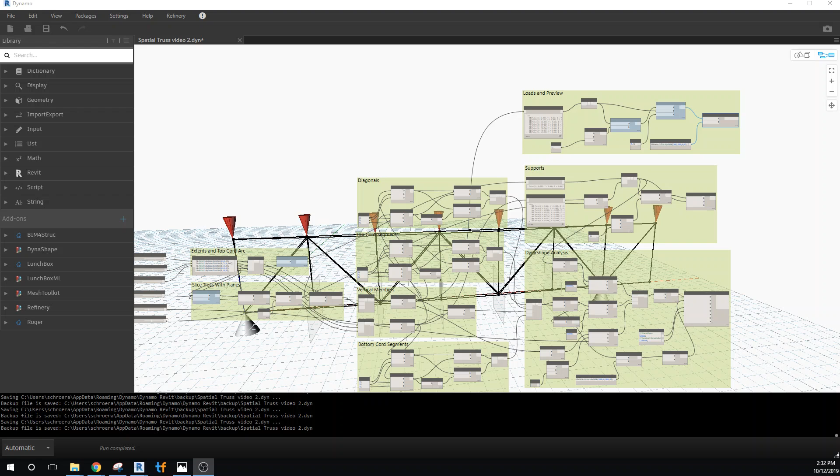Okay, I've gone ahead and cleaned up some of the code, and I pulled all of the inputs over to this side, out of some of these boxes. I'll zoom into these various sections so you can compare your code to what I've done.

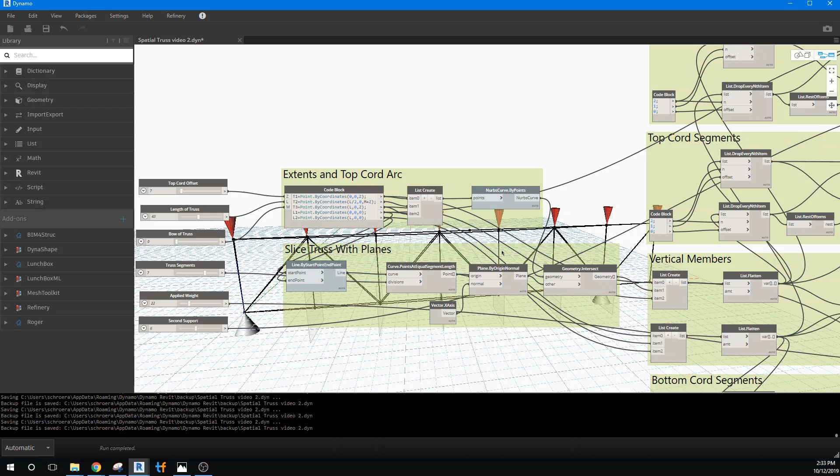So we defined the shape of the truss, with 3 top points on the top chord and 2 bottom points. We sliced it up with planes, and then pulled all the segments out that we got from that.

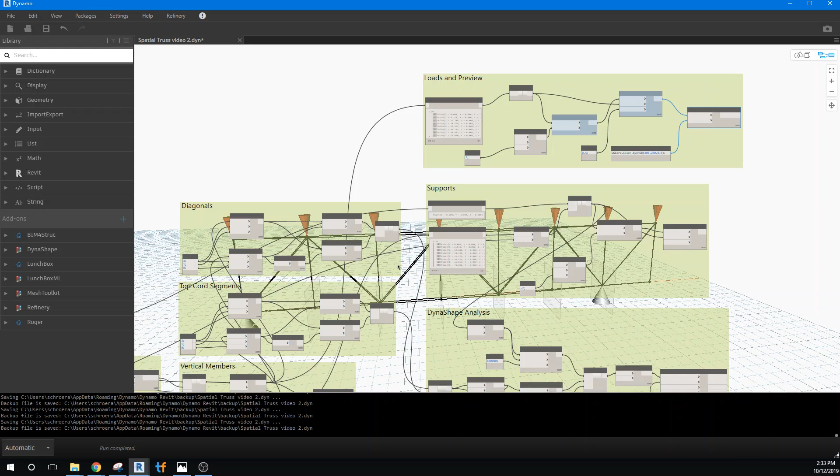That gave us a relatively straightforward method of making a truss system. Then we created both a load preview, and I'll zoom in here so you can see what this looks like again, the load preview.

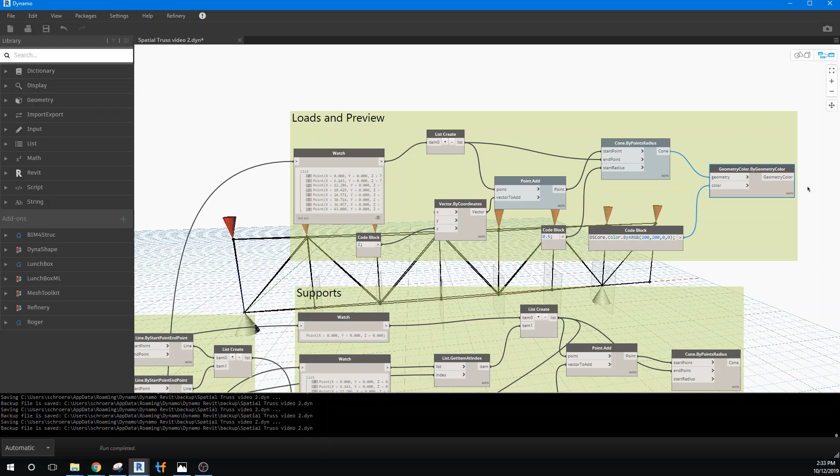It doesn't come off of here for the actual loads, we're actually stealing it. Where does it show it coming down here? I'm not seeing the loads attached. Oh, that's because they're coming in here, so there must be some place that I grabbed them down there.

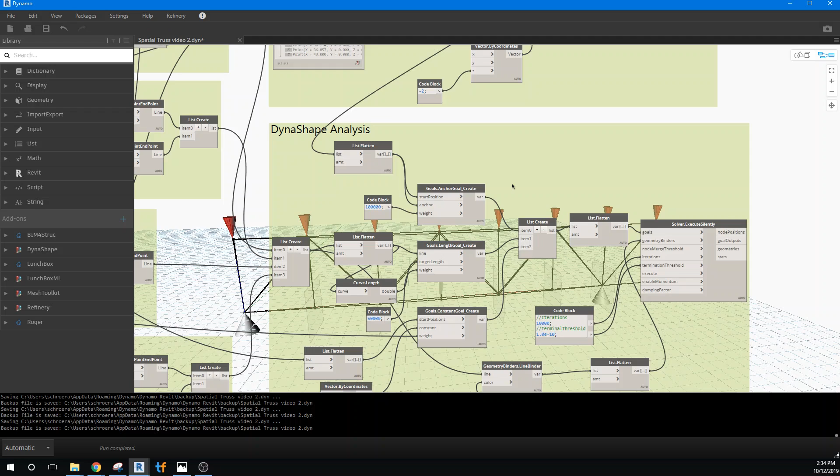Anyway, so that's just the loads preview. Our supports, we're taking our supports and putting them down into our analysis. And then down below here, we're getting into our analysis.

If I pull this whole thing off to the side and zoom in on our sliders, I think this is a great chance to experiment around with what we've actually created.

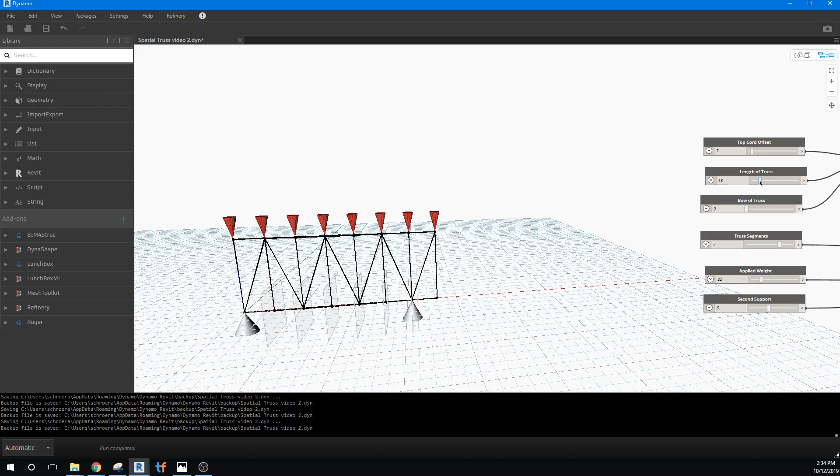So we can control the length of the truss. We can make it longer, and as we do, we see a little more deflection in the truss system, from basically looking like nothing to seeing this appearance of some deflection here.

And if we make the truss shallower, you'll notice that the truss loses its strength. Here we have extreme amounts of deflection happening when the top chord and bottom chord are offset a little bit.

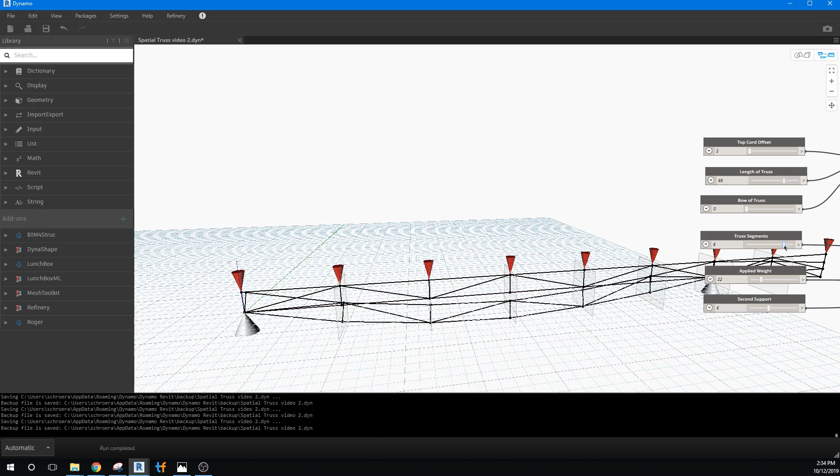We can see what happens if we add truss segments to it and whether it gets stiffer. And we have obviously this support over here on the side.

We can then reduce the weight, which just gives us a way to modulate how much deflection we actually look at. And we can pull the second support in or out depending on how we choose to do that.

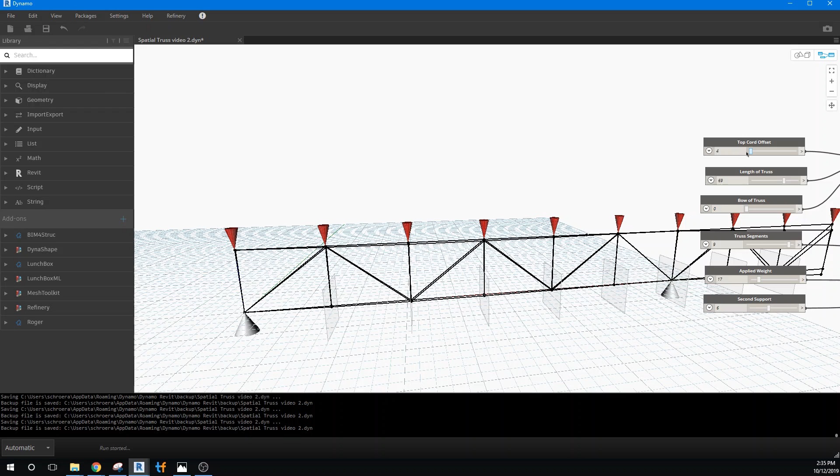So we'll actually offset the top chord a little bit so it behaves a little stiffer. Whoops. Let's pick a medium range value here.

The other thing that we can do is actually bow this truss, which is a nice feature. So we can continue to go up and make it a bow truss for a roof system. There's a lot of interesting things that can be done here, changing segments, how long it is.

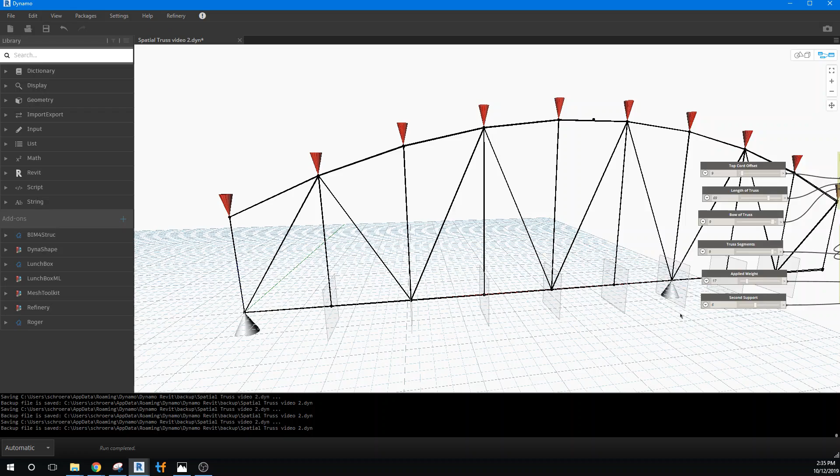With that in mind, we'll move off now to actually being able to visualize this idea of whether an element is in tension or compression. So we have this output of our geometry, and we're going to make a section, I'll call it evaluate strain.

So let's take a look at what these geometries look like. I'm going to make a watch list. These are the deflected geometries, not the original geometries. And it turns out to be a list of lists.

So the first thing I want to do is make it a much simpler list, so I'm going to flatten it. If I pull these geometries into a flattening and look at this list, now we have a list of just lines, those are the actual deflected lines.

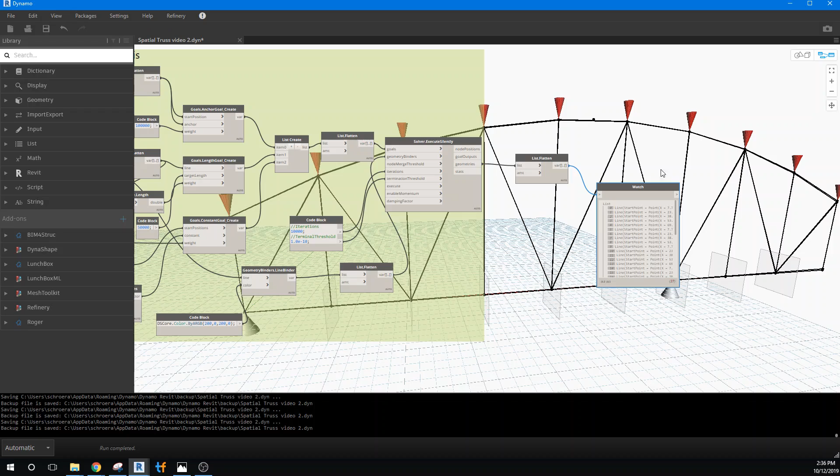If I accentuate this a little more, let's go back and do some adjustments to our truss as we work through this. I'm going to make the truss a little bit shorter so it fits on the screen better. I'll take the bow out of the truss, and 9 segments is fine.

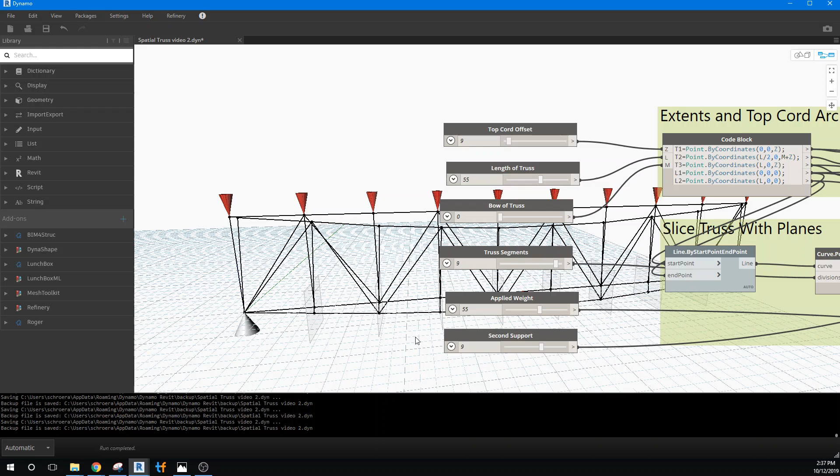I'll put a little more weight in so we can actually see the deflection, and we'll deal with it as a simply supported beam. So I'll put this other support all the way out at the end, which happens to be 9. Now we have a pretty good visualization of a truss and its deflection.

So we have this idea of a starting geometry and then a deflected geometry. Those come from connecting the nodes together with how much each element has elongated, and you get that appearance of deflection. So we have those lines, and also the lines, I'm going to copy the list flatten again.

As I said, we also have the lines for the starting geometry. If I highlight this, you'll see that's the flex geometry. And if I go back over here and look for this geometry, I believe it is, let's plug that in.

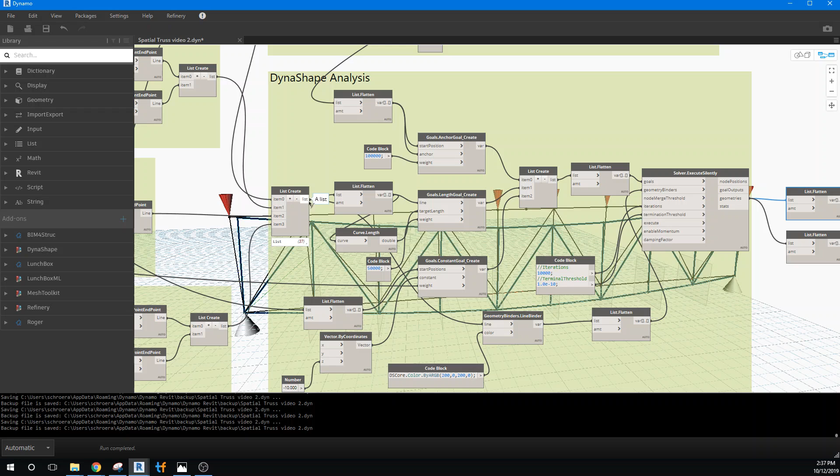That's our starting geometry. I'll move this green thing out of the way. So we have both the A and the B geometries, so we can use those to compare whether the component has actually gotten longer and or shorter.

And we have a tool that'll help us do that. I'm going to pull the watch box off a minute. It's under geometry and curve. We can evaluate the length of a line, but we'll just deal with it as a curve right now. We'll call it a curve.

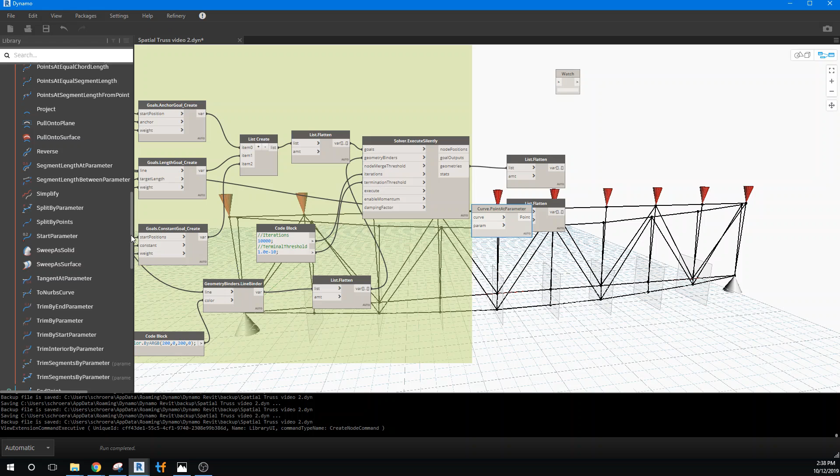And what we want to do is find its length. So let's see if I can find this quickly, just going through the list. This is quite a list here. I'm not finding it - segment length at parameter. I'm not finding it easily, so I'm going to just type in curve length.

And it was just under length. So if we put this in and a curve, what we're going to get out is a value. So we get either - these are all the ones that are 10, and they're either a little bit shorter or a little bit longer depending on how they're deforming.

And we're going to duplicate that and actually grab the same thing off of the original one. And I don't know where that came from, so I'll just remove it. Okay, so now we have this idea of both a length of an A and a B.

And what I want to do is find the difference between these two. Just for the sake of the way I've organized this in my code that I've already written, I'm gonna swap these this way because I've got a code block that I'm going to put in here that takes in the data a certain way. So I'm going to grab a code block.

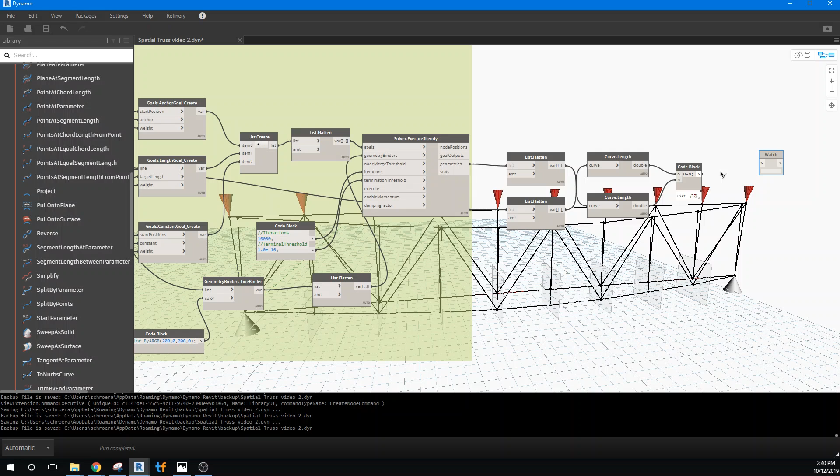And I'm going to take the original shape, and I'll call it O. I'm going to subtract the new shape to come up with a value. So the original minus the new, and all I'm doing is coming up with something that is just the difference, the change in each element's length.

Let me just zoom in here because this is important. Now you'll see that they're either positive values or negative values, which means the length of the element either got shorter and or longer.

And right now we want to pull off some information in one of two ways. We want the absolute change in this to show the significance of the stress or strain, or excuse me, the compression or tension on the element, but we don't want to deal with the negative. So one of the ways to deal with that is to do an absolute value.

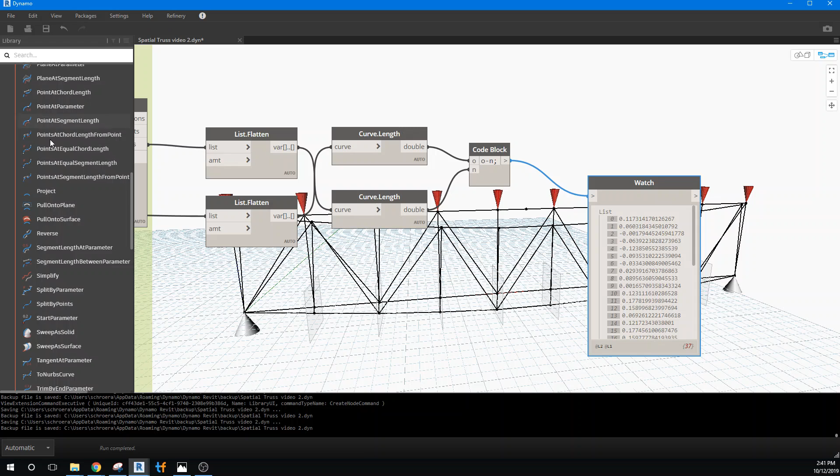So under math, I think we have - see if I can find that quickly. Math, we have a concept of absolute value. I'm not seeing it. Oh, here it is. Absolute value.

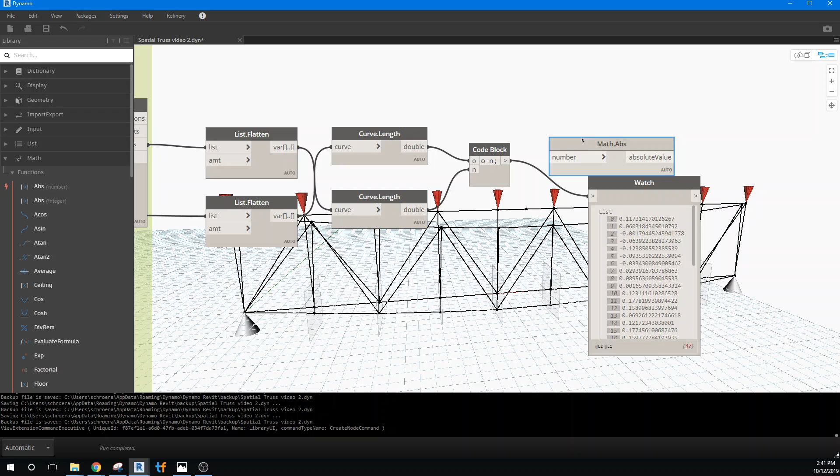And we're going to go ahead and plug that in, and I want to just show you quickly how that works. Put the absolute value in now, and all the numbers are positive. So we just have the absolute - the negatives are gone. We've actually lost information because we don't know if it's absolutely a tension or a compression element. But that's okay because all we're doing with this is just assigning this to a cylinder.

We want to make a cylinder around each one of these elements. So I'm going to look for a geometry and a solid and a cylinder, and I want it to be with the radius. And I don't want start and endpoint.

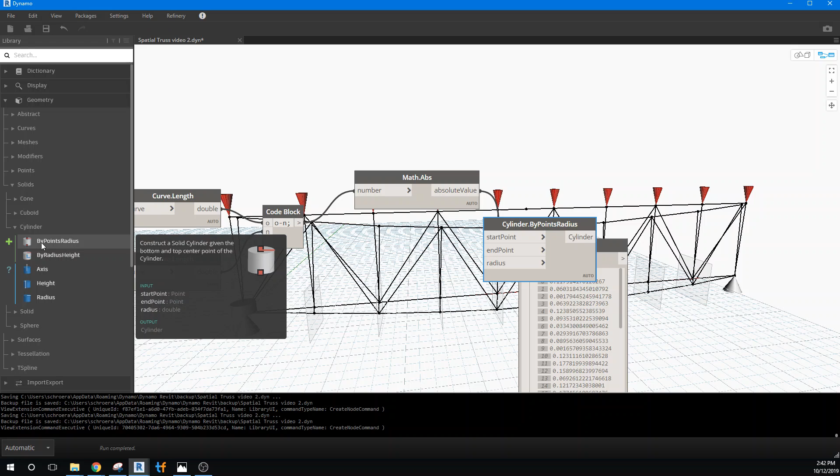So let's see, here's one. Oh, I'm not finding it. Let's just delete these two. And I'll do cylinder by curve.

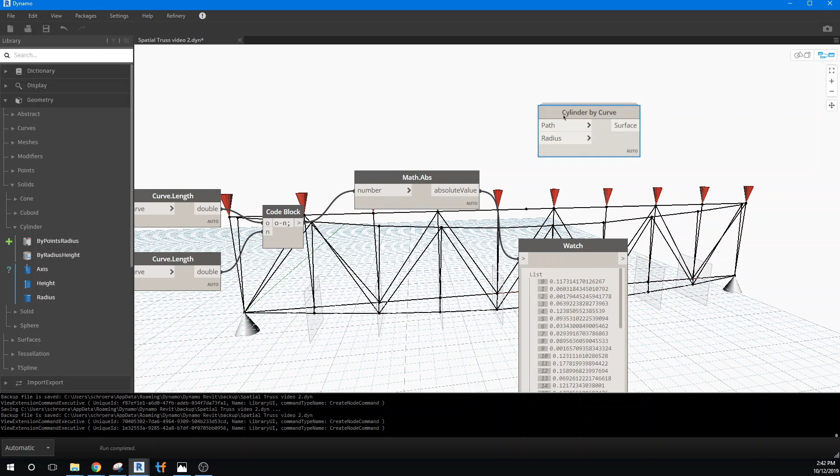And there it is down there, cylinder by curve. It's in a custom node, so I don't know if that's a DynaShape or something else, but it's very handy. I hope you guys have loaded that in. If not, we can discuss when we get there how we're going to do that.

So to start off with, our path is... well, we could just put anyone in for this evaluation. So we're going to add a cylinder by curve by path, and if I plug in this absolute value into the radius, we're actually getting the effect.

If you look back in here, you can see how these top elements are really thick, the bottom elements are really thin. The amount of activity happening is different towards the edges than in the center. In this place, you get thicker towards the edges. So there's a lot of things going on here that are changing that. But what I'd like to do is make that a little more controllable.

So we're going to remap that number. What that means is I'm going to take the numbers coming off of this. If I put this into the watch list, these all go from really small items to relatively large items. We've got almost a factor of 100 of change, and we probably want something a little more subtle than that.

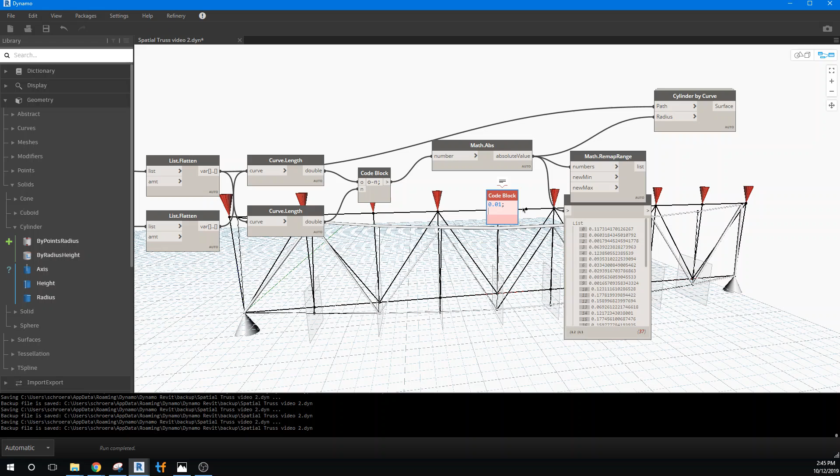And so that code block will be, we right now have 0.01, to, I think I need a 0 in front of this, to 0.1, and we'll feed those in.

And now our math range, if we connect this up, all fits within a tighter set of parameters. So I'm going to feed that into the radius, and you'll see how that works out as we go along. That gives us control over the diameter of our cylinders.

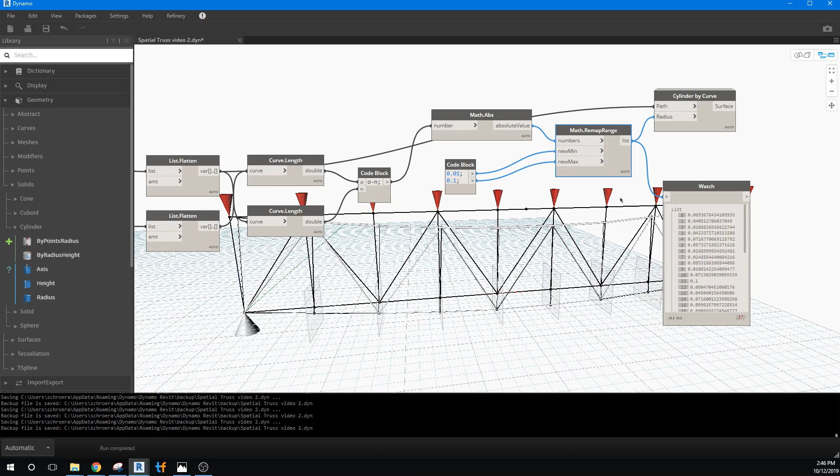Now the next thing I want to do is add some math or evaluation to find out if it's in tension and or compression, and then make a decision on what color to make it. We can have a nice function for doing that.

We have an if-then statement. So I'm going to go if, it's under logic. Let's see if we can find it here. Math logic, yep. And/or operators, nope, logic. Well, that doesn't give us the full range here.

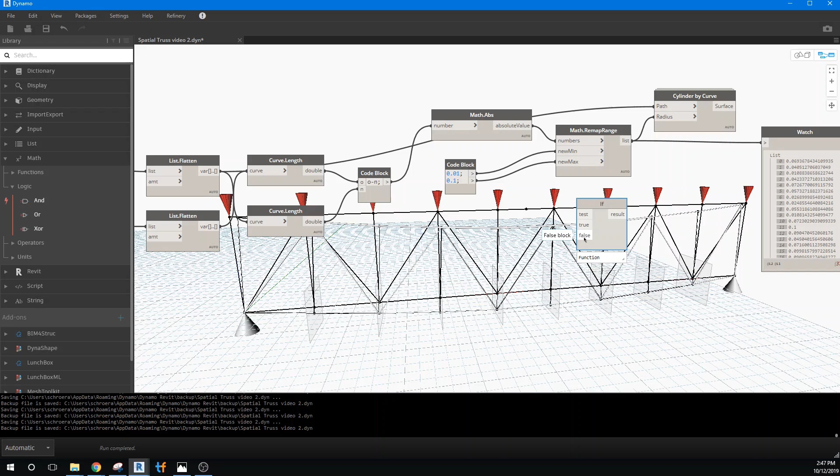So I want an if, and I want it to do a few things for us here. I want it to be a test. Let's see what happens if I select this one. There we go. So if that number is true to the test, then make it something. If it's false, then make it the other thing. And the thing we're going to make it is just two different colors.

So we're going to build up a code block. Actually, I'll just copy down a code block we've already made here. Here's a color code block over here. I'll do Control-C to copy it, and come over here and paste it.

And this one, we want it to be actually a red one, and we want it to be full density, so let's go 255. That makes it not have any transparency to it. And we want the color to be 255, and we'll feed that in.

So we'll make it one color if it's true, and another color if it's false. The other color we're going to make is red. So this is actually green, and this one will be red. Put 255 in here for red, and 0 in here.

And now let's go through the idea of what we want as far as a piece of logic. Really, the idea is whether it's a positive or a negative value. So I'm going to make a code block again.

And we're going to put in x, which is the number. And if it's greater than 0, then it will be true. And if it's not, it'll be false. So that's our test. Let me wire up our false.

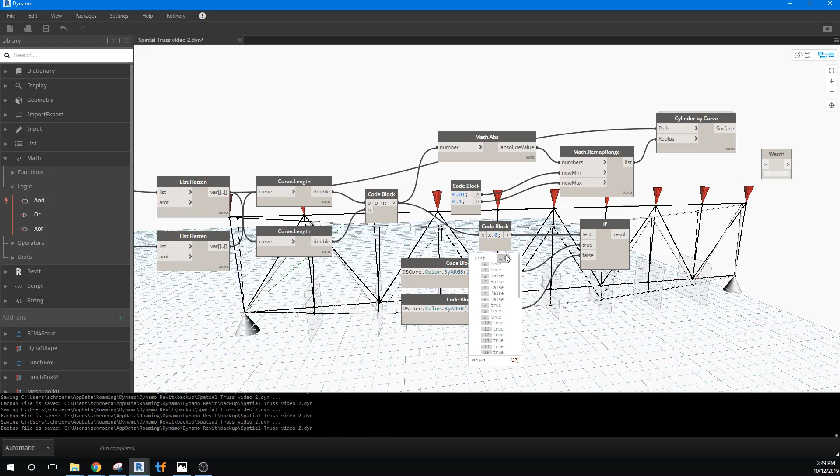Now we just can't really visualize it because even though we've assigned these colors to it, you see it's either red or green assigned to it. We need to actually give the geometry the color. So we already have the cones created, and now we just want to color them.

So we're going to go geometry, color. And we can plug our color in, and we can plug our geometry in, and we should be getting... I'm not getting red, let's see what's wrong with our numbers here. That might be because it's overwritten by the preview.

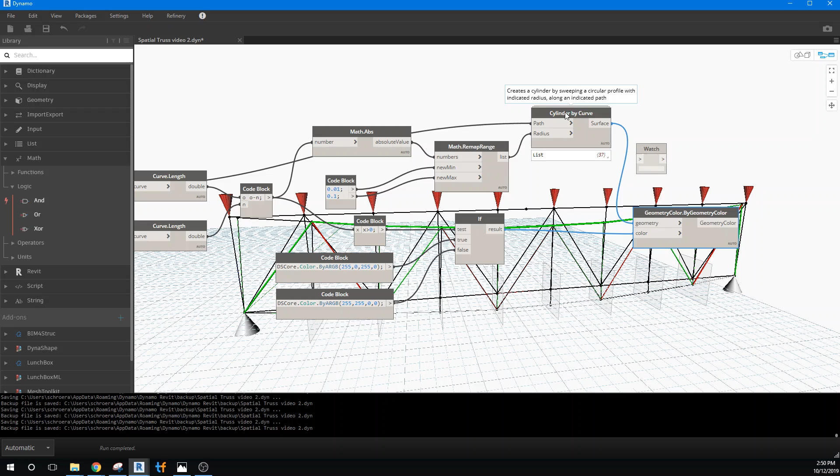So let me just turn off the cylinders altogether. Yeah, that's what's happening. And if we zoom in here now, we can see which elements are under tension and which elements are under compression. And the only thing I don't like is that these really aren't very significantly large elements.

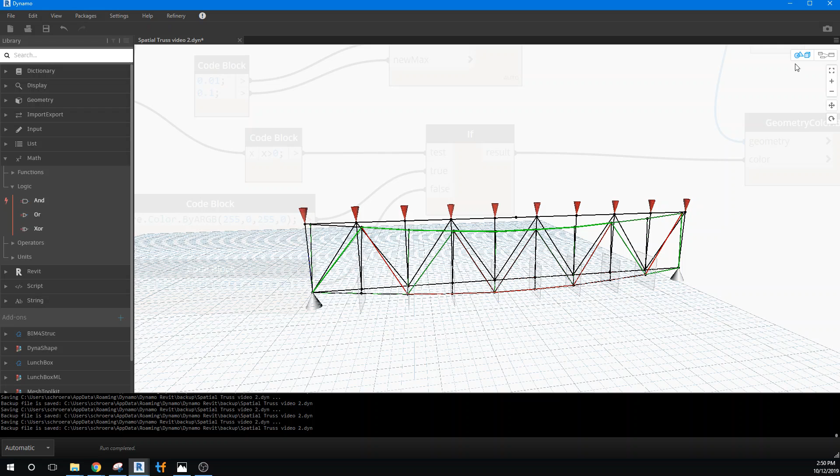So that's a review of this, and I'm going to now just review a dialogue of how to create this. I'm going to group these all together again and call this evaluate strain.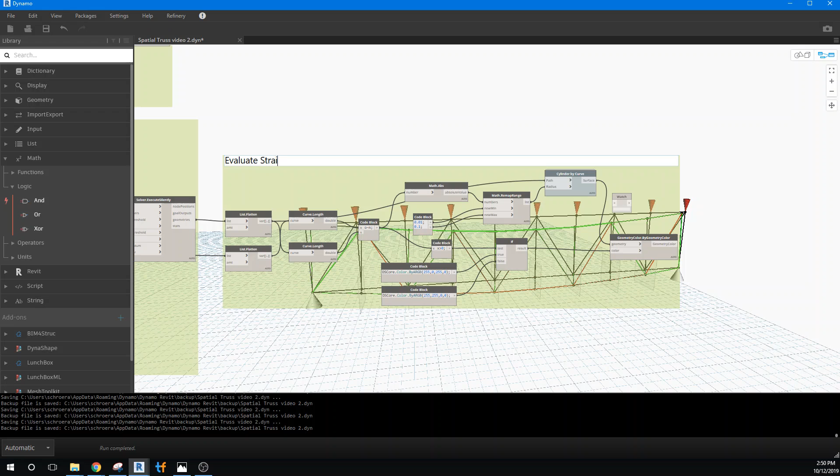And the only other thing I'm kind of unhappy with now is that in this math remap, I'm not exactly happy with these value systems. So I'm thinking that maybe I want to change these a little bit. So I'm going to zoom in here. I'm thinking maybe that if I made this 0.1, let's say to 1.

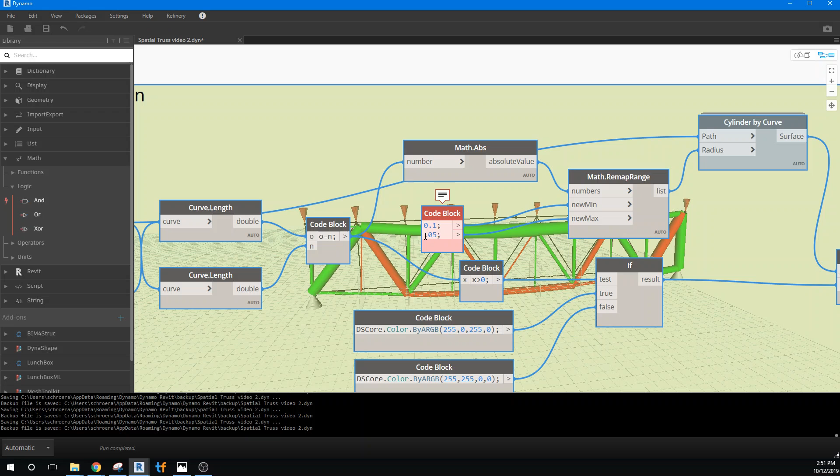Now our elements, you can see how our elements get really huge. So that's excessive. Let's pick something at 0.05, and we might leave that at 0.1. Oops, I need a 0 in front of this. Oh well, 0.1 doesn't make sense, 0.5 is what I want. Let's delete that.

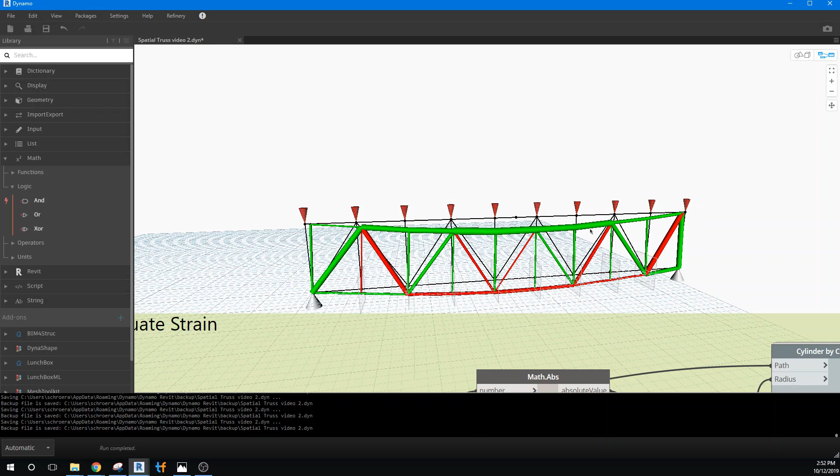All right, so hopefully you're getting the idea there. Now we can control the significance of the thickness of our elements that we're expressing, basically by the size of the cylinder, how much stress is on each component.

So let's go now and back off on this, and then we can go ahead and play with it a little again. I'll zoom in here. We can make our truss a little bit longer. It's not going to affect, it'll still be able to do the calculations, but you'll notice how it's deflecting differently.

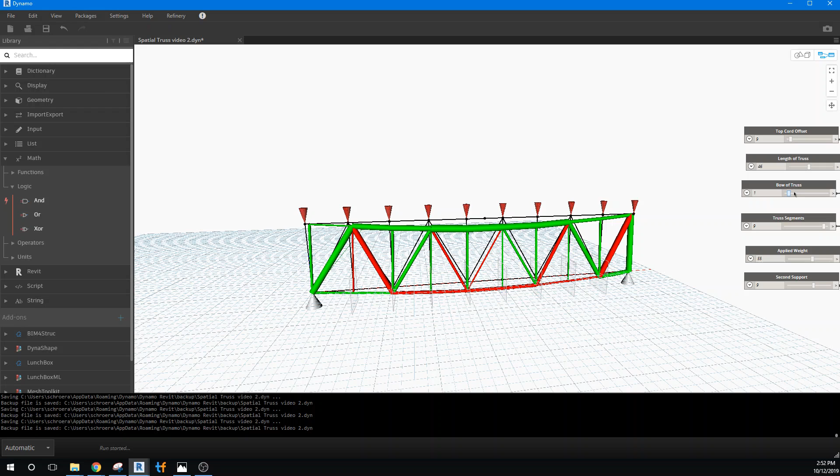Let's see how it works with bowing the truss. That's pretty interesting. We have a compression element on one end and a tension element on the other one.

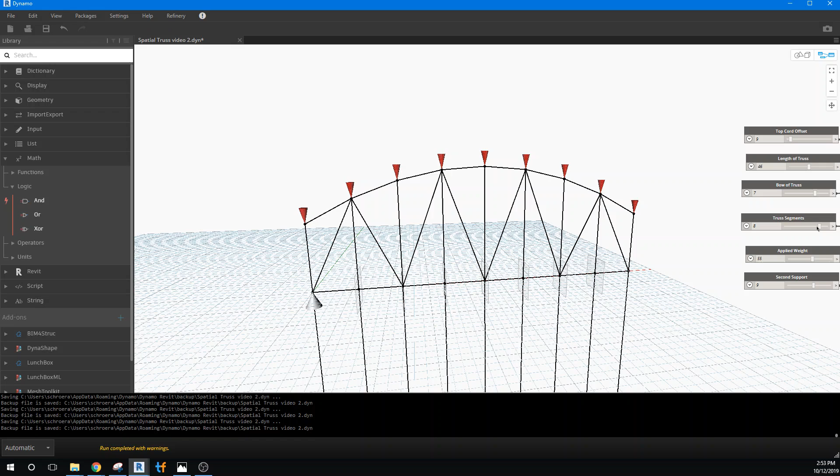And maybe if we went to a more equal number of segments, let's see if we go to 10. No, we can't. I don't know if we can ever get to... no, that looks a little bit screwy to me. Whoops. If we have 8 truss, we can't go over a certain number because we only have the second support at a certain place. Truss segments at 7, let's go to 8 here.

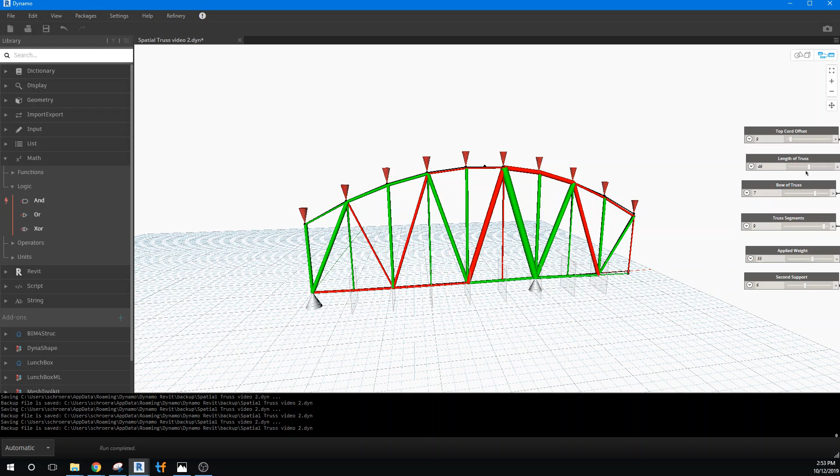And let's see what happens with a bow truss if we move in our second support here. All right, this all makes sense because obviously this is carrying load and is pushing these things into compression like that. So I think it's a really kind of a fun project to go through and see a representation of the stresses and strains that we put on a truss system. Let's make this a little bit shorter now.

There we go. So for finishing this up, I would want us to obviously have some nice clean code and then run some variations of our evaluations of the truss.

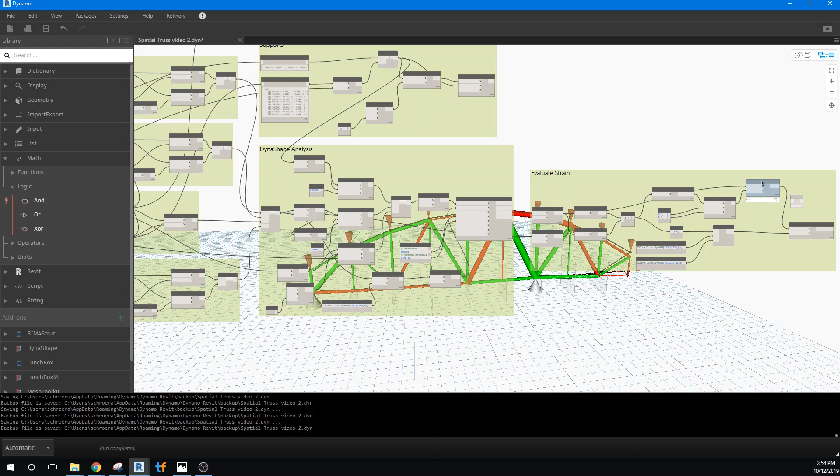What I'm going to do after this is probably look at another object to put here. Instead of using a cylinder, we could probably just put a flange here. It really doesn't make sense, these look too much like their actual construction elements. We might want those to just always be tubes, but we may want to have something coming off of this like an extrusion that shows us how much stress or strain is on each component. So I'll try that out in the next clip.